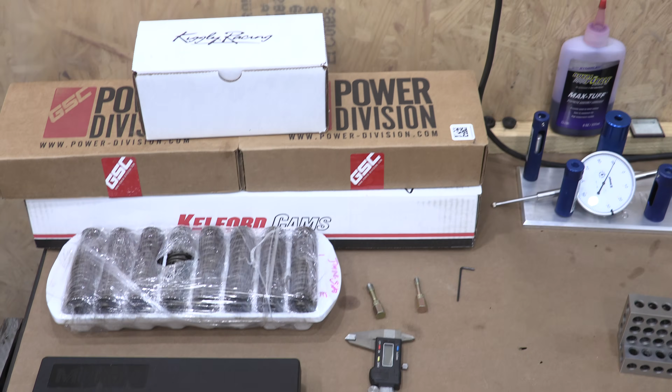Today I'm doing a job that doesn't usually receive the attention it deserves in anyone's home garage. We're going to fondle a few parts and tools, give them all a quick how-you-doing, and then jump right into installing a brand new set of valve springs.

Manufacturing tolerances and variations in the machining of all of the valve train parts can cause anomalies in the height of the valve springs once they're all assembled, and these variations can lead to some pretty ugly problems. People go through great lengths to balance their rotating assembly in the block, and this is the equivalent of doing the exact same thing to the cylinder head.

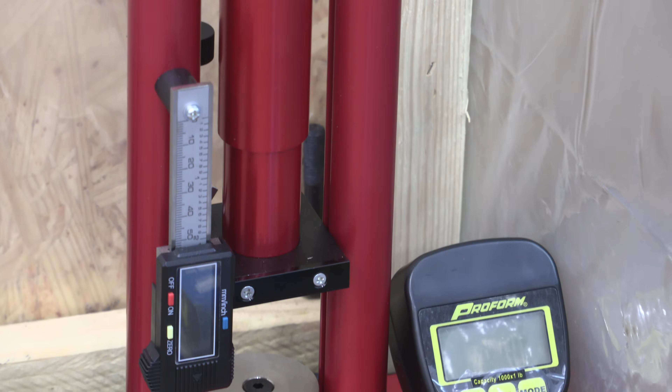So in this video, I'm going to show you what these tools do and how I use them.

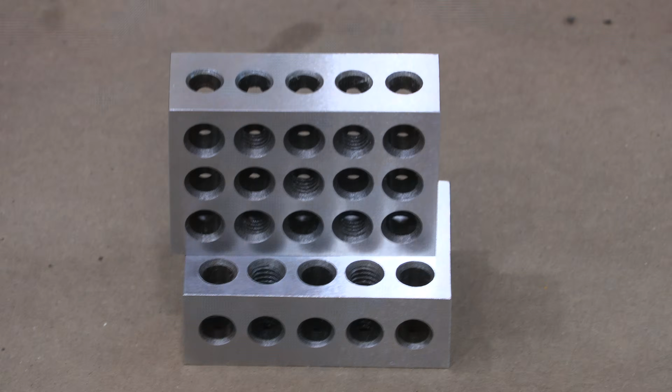These 1-2-3 blocks are really for calibration of depth micrometers, but they also provide a machined straight edge that works great with my stem height gauge. They're called 1-2-3 blocks because depending on which side you set them on, one side is 3 inches, one is 2 inches, and one is 1. I do have a depth mic, and maybe we'll play with it later.

Most people use it for this job, but because of the kind of stem height gauge that I'm using, I won't need it for most of this work.

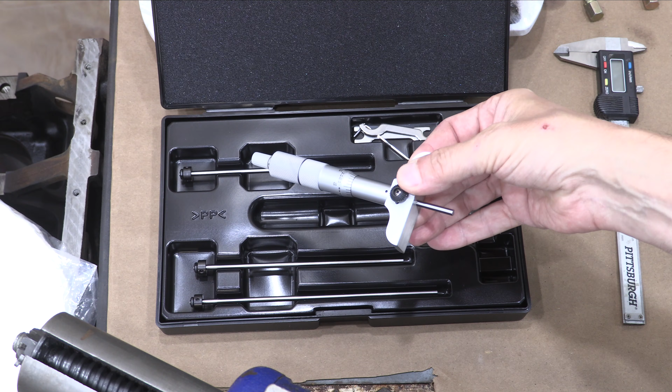Before you begin, your valves need to already be fitted and sealing against the valve seats. That's the stubborn, unchangeable variable. Know that every single part that you stack on top of each valve after that will affect your spring installed height. Keep it all together.

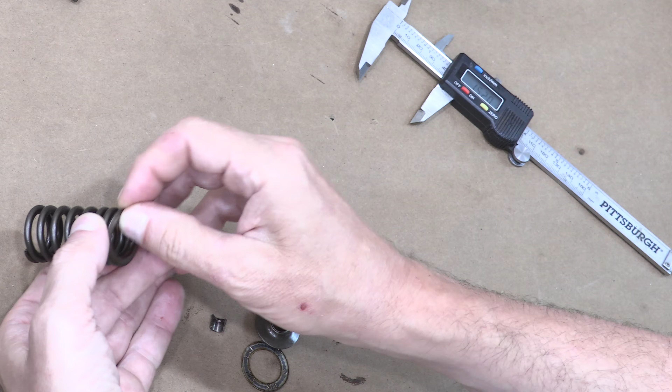Each valve assembly consists of a spring seat, a retainer, and a set of keepers. The keepers are half-round, conically shaped, tapered, hardened steel things that fit into the groove on the tip of the valve, and they rely on the spring pressure to lock them into place. It's what you call an interference fit.

One set of keepers isn't going to fit the retainer and valve the same way that another set will, and this will affect where the retainer lines up on the valve stem. So basically, all of these parts have a thickness, even the keepers.

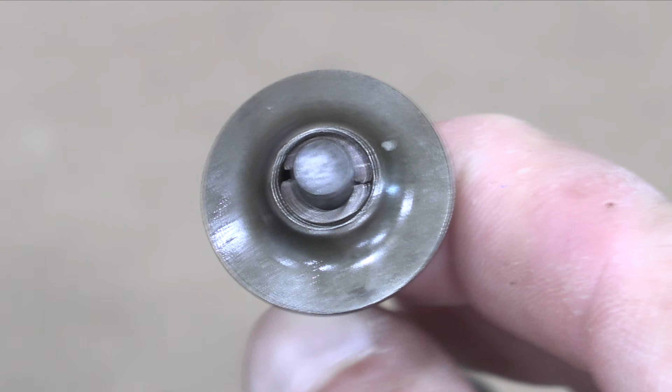The bottom of the retainer has a recessed flange where the top of the spring sits—that's essentially your upper spring seat. The protruding portion below it should fit snugly inside each spring to center it, but this gap complicates measurements for many people. All of these parts need to be measured individually and paired up for the best fit.

The more evenly you're able to balance how they all fit, the smoother and longer your valve train will operate.

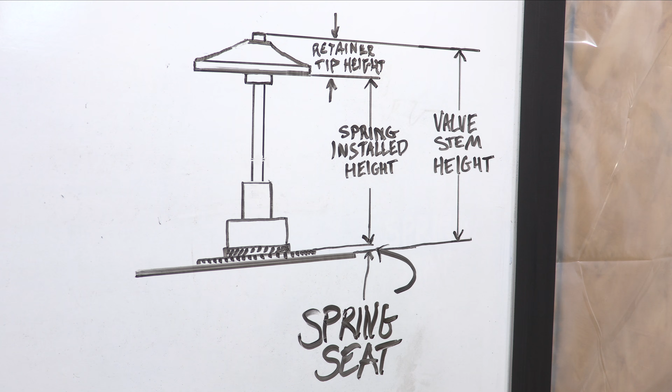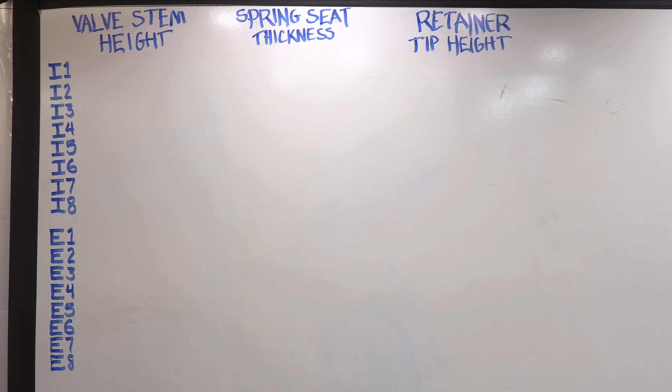There's 3 measurements that we need to focus on to see where we're at: valve stem height, spring seat thickness, and retainer tip height. Only 3 measurements? Well, that's easy. Yeah, times 16. Okay, so maybe it's 48 measurements, and maybe we're only just getting started. Judge me. Start with the stubborn, unchangeable variable first.

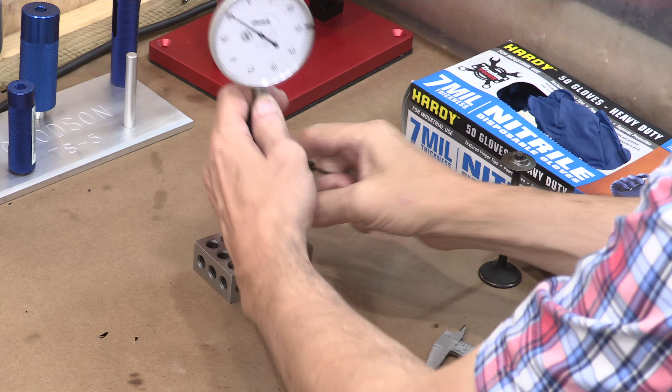To measure valve stem height, it's recommended that you use a valve stem height gauge, but there are other ways. I'm going to use these 1-2-3 blocks to set the zero point on this Goodson valve stem height gauge. This tool remarkably has a 2-inch range, graduated in thousandths of an inch, so I'm just going to put this unit together with the jig that fits my valve seats and zero it on a flat surface. This Goodson unit keeps me from zeroing a tool and then measuring a tool with another tool.

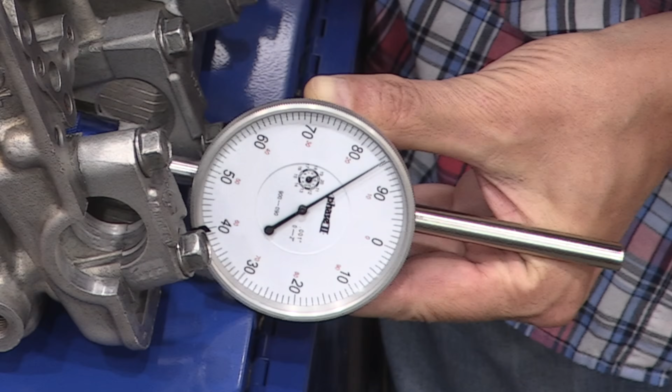Using it is simple. You place the probe tip on the top of the valve stem and fully insert the gauge so that the jig rests squarely on the spring seat. You'll know exactly when you've got it right because if you rotate the gauge, the needle won't move at all. That's how you know it's good.

I've actually already measured these exhaust valves once before, and you can't do the whole job facing the gauge in one direction so that I can show you, because it interferes with the camshafts. It's a big gauge, it's a very tight fit, so I'm just going to blaze through these, checking my previous measurements for now. And there you have it—stem heights for the exhaust valves.

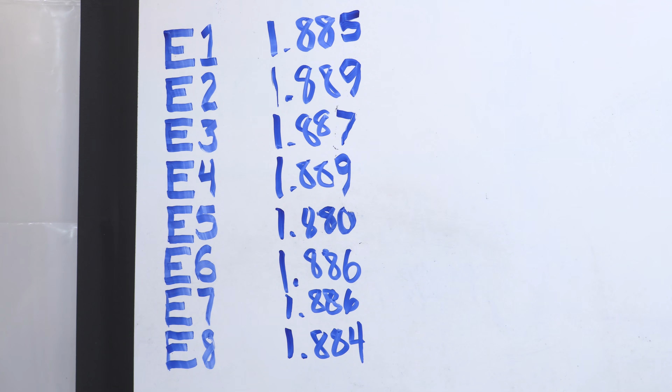Same thing has to be done on the intake valves too, so I recheck my zero point, ignore the parallax error right here from the camera angle—it's actually right—and like I said, same thing.

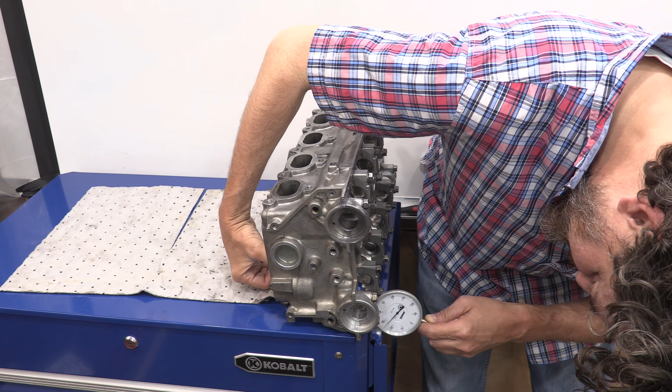I'm holding each valve firmly against the valve seat to ensure that the spring belonging to the stem height gauge won't push the valve open. Because it totally can, so be aware of that.

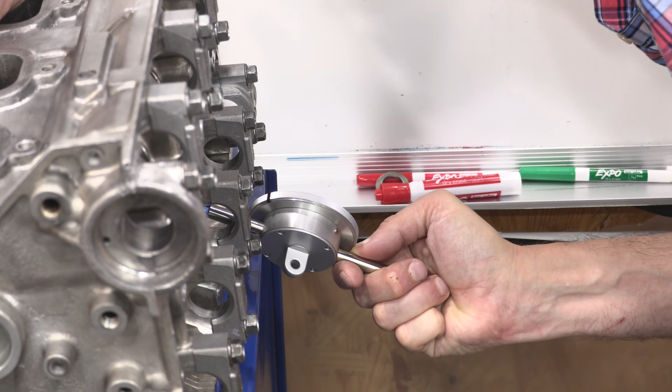Write each number down. What you see in these results is that even a factory valve train that's never been cut, with a brand new quality set of valves and straight guides, produces a variation in stem height of 1/100th of an inch, a little over 0.25 of a millimeter. Depending on your goals, this could be enough to cause a problem with seat pressures all by itself, except I'm going to demonstrate how everyone can actually use this to their advantage.

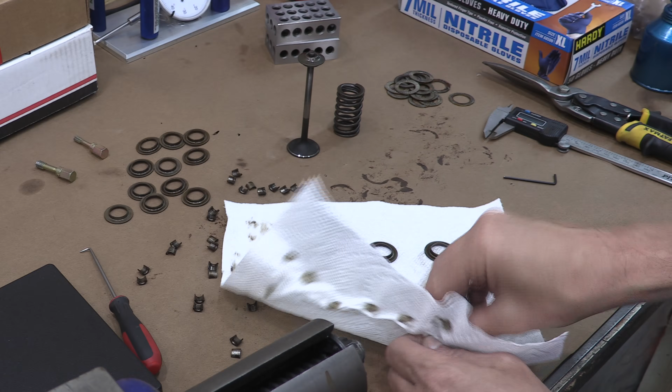Next, we'll do the easy ones: spring seats. Other than mine being shrink-wrapped into an ice cube tray with all the other associated parts from the old Galant head, and speaking of which, might as well get those other parts too. I need the keepers, and there's even a set of shims in here that I plan to measure. But anyway, other than having to dig all this out, mine are totally uncomplicated. Some have an outer lip making them harder to measure, but mine don't.

I gave all of it a quick wipe down, and now that I've dug the shims out, I really can't resist measuring them any longer. Looks like all 16 of them are 30 thousandths. There's no way anyone cut 30 thousandths off the valve seats from the head these parts came from. There's only 8 thou there to cut, so it's an odd shim choice.

When you measure the seats, you'd measure from where the spring rests to the bottom of the seat in several places around its circumference, using the tips of your calipers aimed at the center of the part. Make sure they're all the same measurement and write it down. Do this for all your spring seats. For the severely retentive, number all 16 and keep them in order.

I'm a little bit lazy. I cheated—I made different piles for different sizes, and I'm just going to put them where I think each one needs to be in the seat pockets in the head, because mine are all really close. They all measure between 40 and 42 thousandths. There was only one that was 39 in the pool. This is just my way of keeping them organized for now.

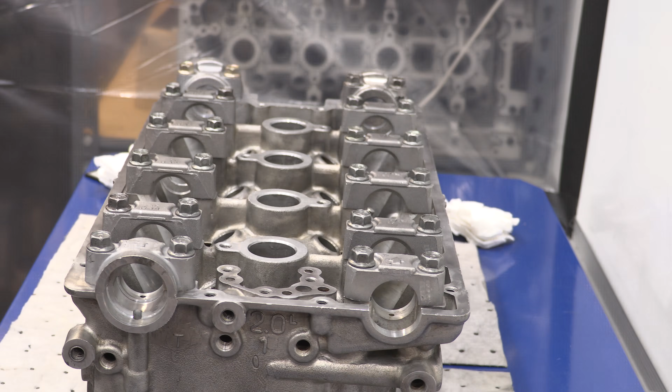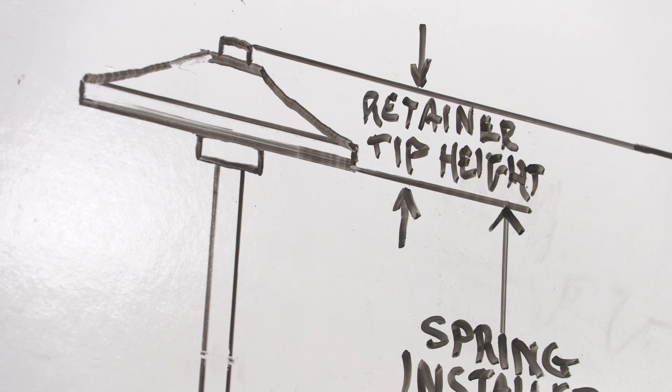This is where things get fun: measuring retainer tip height. Of course, to measure this, I'm going to need to put all the valves back in the head first. I numbered these things in the last video to make them really hard to mix up. I just put them back in the boxes they came in.

Next, I get all the springs and the retainers out of their packaging—cool, because I love opening new stuff. One of the things I like about Kiggly beehives is how the tapered springs and their smaller diameter retainers help focus all of their lifting forces closer to the center of the valve than the factory spring does. That actually helps reduce the potential for damaging valve guides because it holds the valve more upright in all of its movements. It's also much lighter with the titanium retainers, but I just bought the standard steel ones because my power and rev limit goals don't require that on this build.

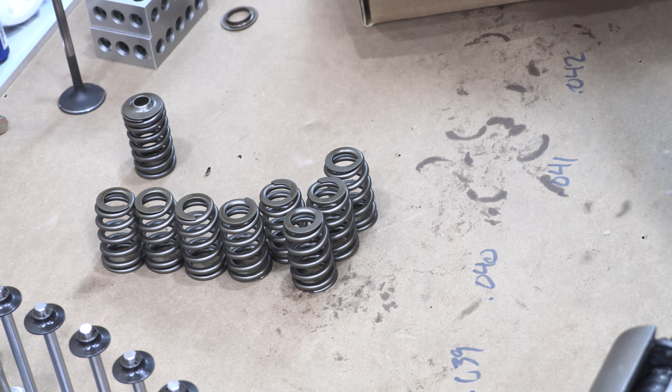Retainer tip height is usually a combination of measurements because of the shapes of the parts, and that's plural because the retainer, valve, and keepers all play a factor in the result. How they fit together suddenly matters in the math. You've got the thickness of the retainer, the depth of the step, the differences in the keeper tolerances, and even possible differences in the overall length of the valve if there's ever been a valve job performed on it. Add to that, the flat surfaces you need to measure are offset, making it impossible to fit your calipers simultaneously on both surfaces to take an accurate measurement.

I can show you the complicated version of doing these measurements, but...

Yo dog, I heard you like vices, so we put a vice in your vice. Oh no, Jafro, what are you doing?

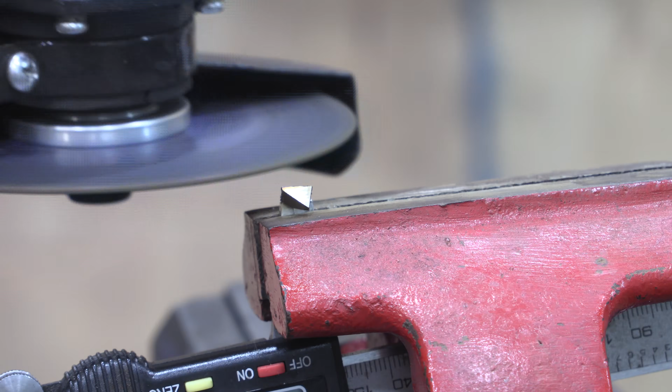Yes, I cleaned that up with a flat file, and now I've got offset calipers for measuring retainer tip height. Under 20 bucks at Harbor Freight.

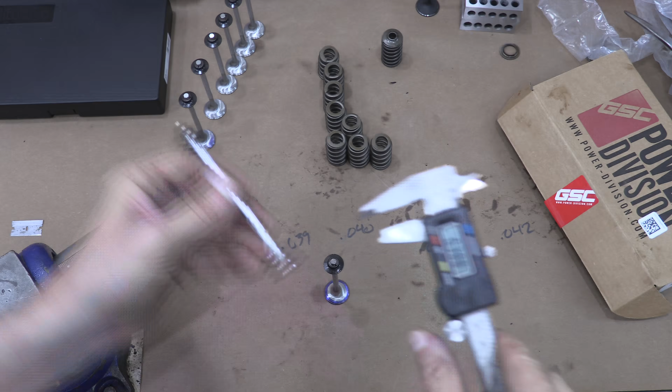I had to share this little trick I learned from Boosted Beaver's build thread on DSM Tuners, he's on YouTube too. The only thing you have to be careful about is keeping the valve and the caliper square with one another, and keeping the tip of the caliper centered and square on the tip of the valve. You get a feel for it, but you'll develop that feel faster if you backlight it. It makes it easier to see if you're square.

Write each one of them down and keep them in order. You can see I've got a variation in retainer tip heights of 15 thousandths of an inch. Now let's do the intake valves, same exact thing.

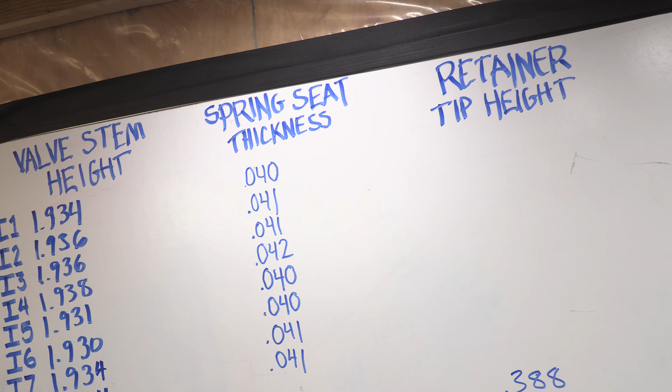You thought I was going to make you do all that math, didn't you? Well, this fits the price, quality, speed, pick 2 example. It simply adds easy to the mix.

If you want other measurements explained by a machinist, look up my Cylinder Head 203 video. That's what happens there. The only reason I hammer points about accuracy in my videos is simply to help people be mindful about what's in their hands and why they're doing it, how they're doing it.

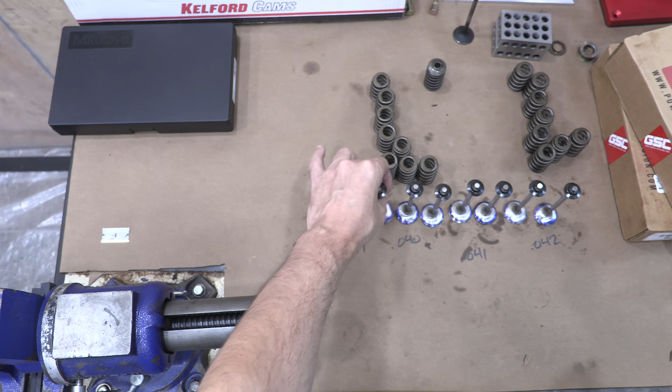The accuracy range of cheap calipers is fine for this job because you'd otherwise have to take 3 separate measurements to get your retainer tip height with the exact same inaccurate calipers, then manually do the math and add all that and mux it together. More than tripling your margin of error because you made yourself a part of the circuit.

I like this trick, and I'll use it for a lifetime, or at least until the batteries die.

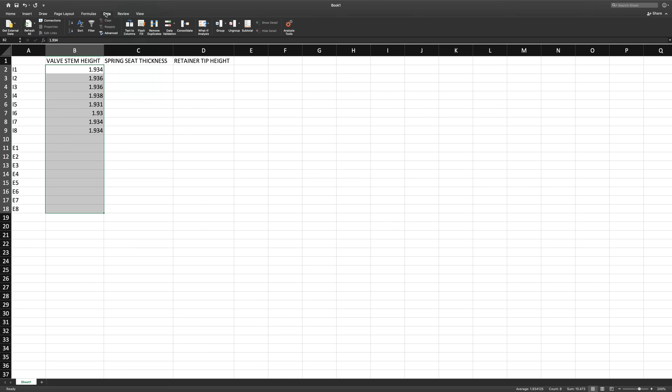Now with all these numbers, we're actually able to determine what the cylinder head's available spring install height is for every single valve. I'm just going to transfer these numbers into a spreadsheet now, because the calculation to do this is extremely simple: it's valve stem height minus spring seat thickness minus retainer tip height.

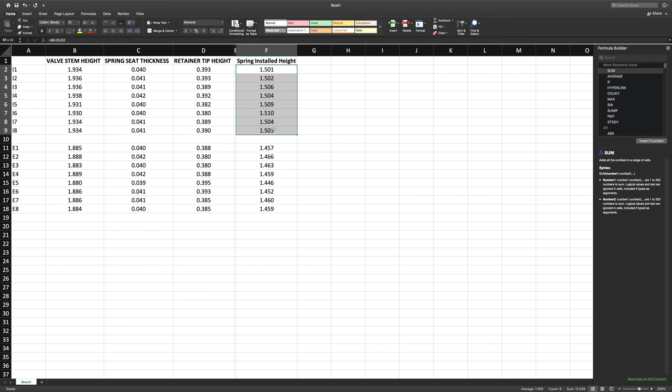I didn't feel like boring you with a whole lot of simple math, so I'll let the spreadsheet do it for me. In fact, creating the spreadsheet is so boring that suddenly I'm back in the garage with all the valves out in front of me again, which I have checked, double checked, and triple checked, making sure I had all the numbers right.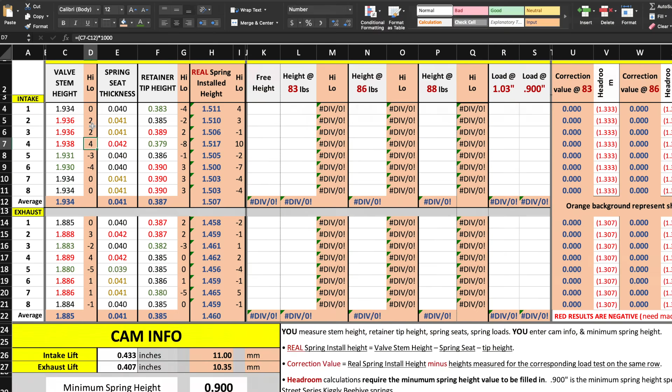It gives me the low, represented by a negative number, and a high, represented by a positive number, based off of the average. So this is 4 less than average and 4 greater than average. That's all there is to this column, that's what the calculation up here says. And you can see I've multiplied it by 1,000 so that it gives me the results in whole thousandths rather than thousandth decimal. So high-low is in thousandths.

Alright, spring seat thickness, didn't do anything special there, this is just pretty much a placeholder. These are all used in the calculation to figure out the real spring installed height, that's an important thing we just talked about. Retainer tip height, same sort of deal. All of these measurements are what we took with the calipers after we cut them.

You can see that I've got a range here of negative 8 thousandths to positive 3 thousandths, so there's my low to high, that's a range of about 12 thousandths of variation. And you know, here, right here, we've got 8 thousandths variation. And by the end, when all the math is done, we have 17 thousandths variation. You can see how reshuffling some of these values will actually wind up giving you a better result. It's sort of like a puzzle at Cracker Barrel, this little brain teaser thing.

So anyway, free height, this is for springs. If you look up here at the top, I've got them labeled: these are valve measurements, these are spring measurements, this is the fit, and all of these are calculations.

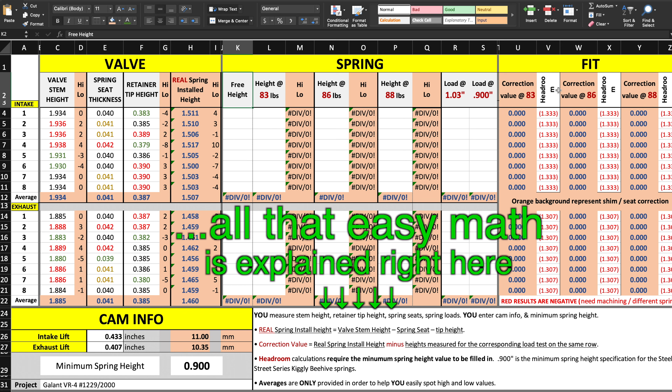This just gives you results to chew on after you finish filling in all of the other fields. Everything is redundant in the top column for the intake as it is for the exhaust. Down here on the bottom, I've got cam info where I've added fields for intake lift and exhaust lift.

This is used in the calculations under fit for the headroom value. Basically you take the height at a given spring pressure, subtract the minimum spring height from it, and subtract the lift from it. By doing that, you come up with how much room you've got until spring bind, because that's what minimum spring height is. Kiggly recommends you don't install the springs any smaller than 9/10 of an inch.

They get into spring bind very shortly after that, but this is the minimum recommended height you should ever use. So I entered that into the value, and that gives me the information for how much headroom is left when I'm finished. If I run out of headroom and get into spring bind, these values turn negative and flip red like they are right now. That tells me I'd have to go get machining or a different valve spring to make that work. I've put notes for all of this in the database so I can use it again someday and know what I'm talking about.

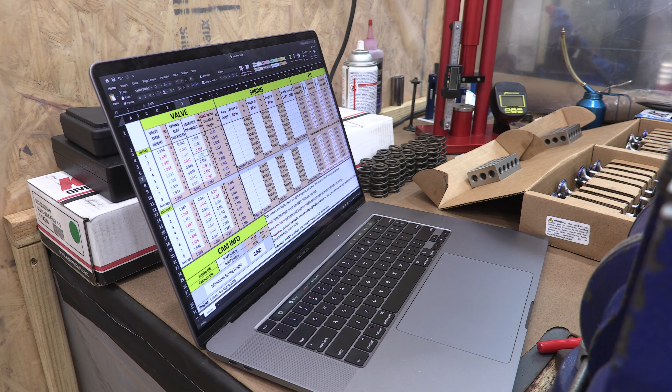The correction values are exactly what they sound like. Basically this tells you the difference between your real spring installed height and the spring height at whatever given pressure we measure in just a minute. Rather than shuffle any of these things around to save time, let's measure the springs first and fill out all the rest of these values, how our springs are behaving, and that'll give us a better idea of where to put things in the long run.

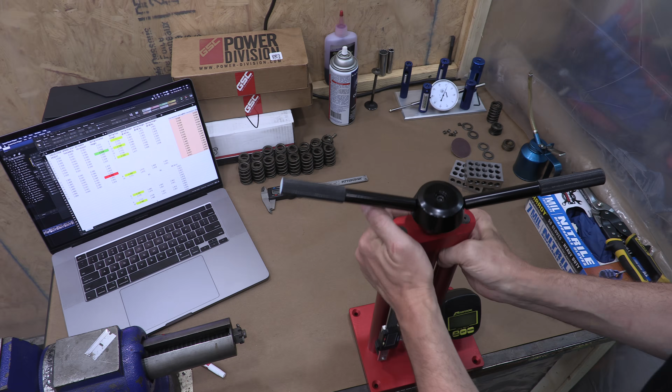Now I know this is the tool everybody really wants to see get used here. This is a Proform valve spring load tester, and it measures the height and spring load of your valve springs. It can handle a spring up to 4 inches and up to 1,000 pounds.

When you move this thing, it automatically turns on the micrometer that does the measuring portion of this process. Naturally it arrives on your doorstep with the batteries installed, dead batteries installed. I'd have to say the build quality on this unit is about 9 out of 10. It's got little cosmetic things, like how well the sticker's stuck down when you put a screw through it and twist it down here in the corner, but you can't see that because it's behind the clamp anyway. It's a good unit, and it's going to serve my purposes.

The first thing you have to do is zero it, and after you get it zeroed, both the scale and the micrometer, you can go to town and measure all your valve springs, and it'll give you however much pressure they're making at whatever height you have them squished at.

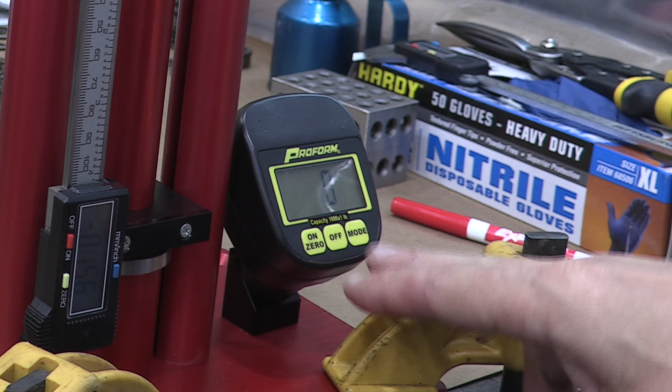Calibration goes like this: basically you screw the thing all the way down. Oh, I have to turn the scale on first. It also has a nice feature where if you hit the mode button and zero at the same time, and the on button, let's see if I can hit them together. There we go, backlighted. That one's not backlighted, but that one is. Pretty cool. So, anyway, the way this works...

If I can get you in here a little closer, the way this works is you basically turn the thing down until you're at 1 pound. And right as you creep up on 1 pound, it happens quick, so after you touch 1 it jumps up fast. But you just creep up on your zero point. When you get 1 pound, you zero that, and it remembers the zero point even when it cuts off.

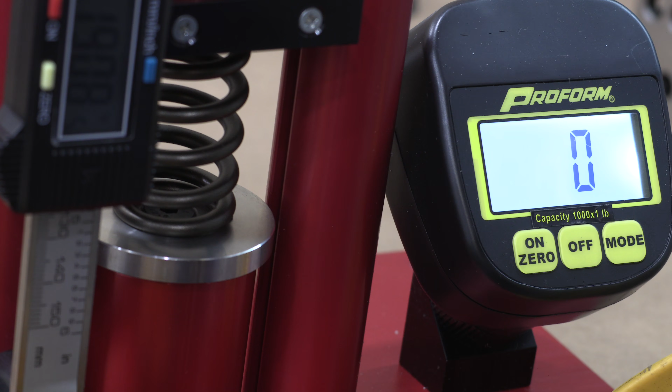So anyway, what I'm going to do is run through the measurements for each of these valve springs and record them in the spreadsheet. Let's start with number 1, and we'll fill this in on the intake side. You line up your valve spring in the very center, crank it down just like we did with the calibration. When you hit 1 pound, you stop, and there is your free height measurement: 1.776.

Now we squish the valve spring down until we hit 83 pounds. That's what Kelford recommends for the seat pressure on the TX264s. So 83 pounds is where we'll take our first point of reference, but I'm going to measure a few other points in between just to see how that affects things in case we have to change the seat pressure around for our needs.

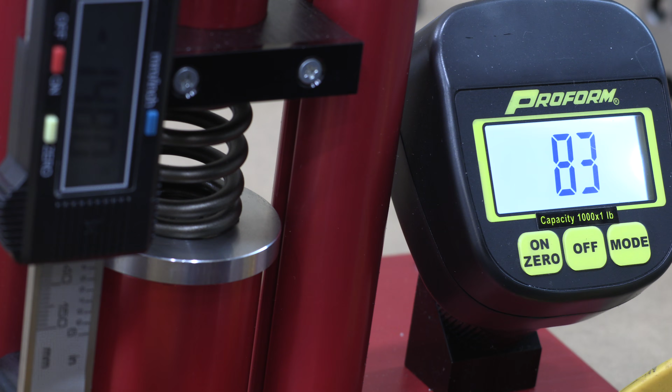So here we are creeping up on 83, and as soon as it flips to 83, we've got 1.480. Put that in the database. And now creep up on 86. We have 1.468. And now we go for 88 pounds. We have 1.461.

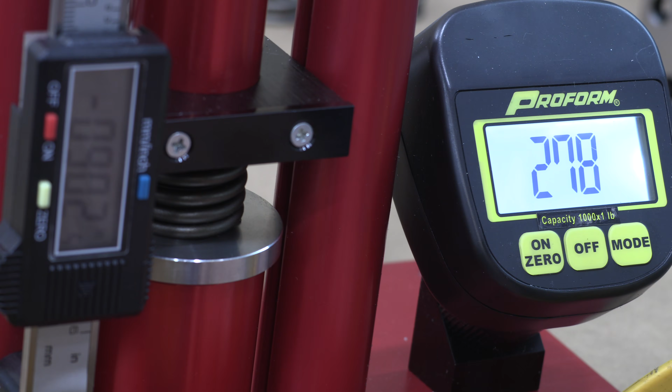Now here's where we start to have some fun. I'm going to crank this down until we get to 1.030, and we have 225 pounds, so roughly 225 pounds of seat pressure when the valves are fully closed. Let's go for 900. You can see at their bind setting, they're at roughly 280 pounds. So at their minimum installed height, they're roughly 280 pound springs.

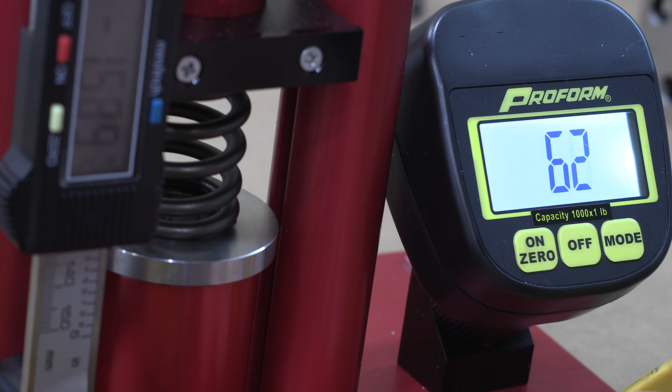Record your measurements, move on, do the next one just like this one. And here we go, adding another 96 measurements to our first 48. I told you we were just getting started.

The free height, 1.03 inch, and minimum install height measurements I took for each spring aren't actually used in any of the calculations. They're just for my own personal reference and to help me get to know each spring a little bit better. So 32 of these measurements aren't really necessary. But as I fill in this data, you can see how the correction and headroom cells fill themselves in.

Alright, so I got all the stuff out now. And now that we're back here again with all these numbers, I'm just going to basically figure out which ones are the big springs, which ones are the big retainers, which ones are the big spring seats. I'm going to shuffle all this stuff around in order to make all these numbers jive and work out, because there's going to be a range of values for everything, and you can see that here. Looking at it at first glance, the real spring installed height, there's a considerable difference of about 40 thousandths of an inch between these two sets of valves.

So naturally, what would be the smart thing in order to preserve your spring height and try to run as low a pressure as you can? You take all your small springs and put them on the exhaust. So I guess right out of the box, I'm going to decide that I'm going to run this thing at 86 pounds of seat pressure. So I'm going to take all of the small values - you can see here I've already highlighted the big ones in red. These are all going to end up on the top, and these are all going to end up on the bottom. So I got to shuffle springs in order to really get a good perception of where that's at.

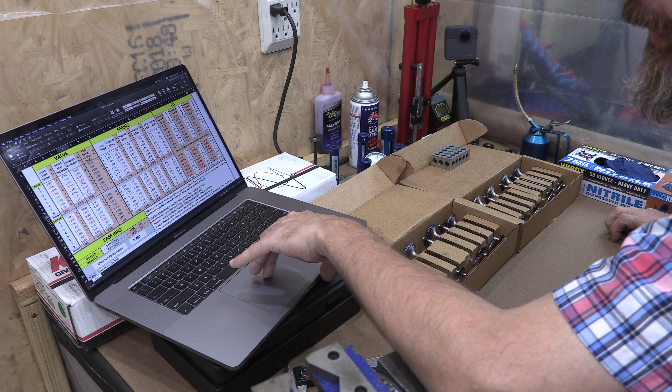So right off the bat, I think what I want to do first is take all of the retainers that are small and move them down to the bottom, and take the big retainers and move them up to the top. This is in an effort to take these averages - you see right here, they're only 2 thousandths apart. By taking all the small ones and putting them together, and taking the big ones and putting them together, I'm just moving a larger gap between these two averages, so there's going to be a bigger step there. You'll see when it's finished here.

So number 1 intake is 383, and I'm going to go ahead and just pop that one off. Which one can I put in its place? I'm going to take number 1 on the exhaust, swap them, check them.

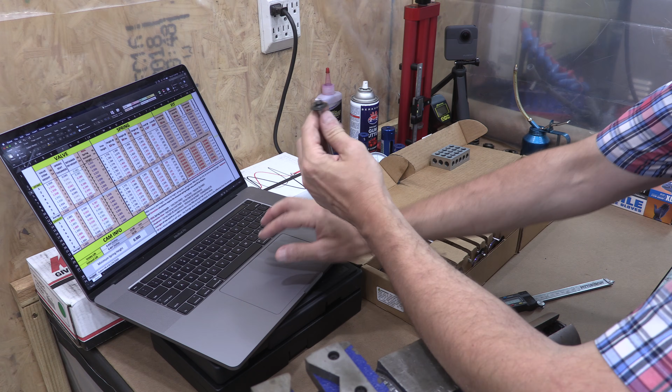Actually got 378.5, which is pretty cool. That means not only did I move it, but I actually gained 5/10. But we know that may not be accurate, so I'm just going to leave it the way it's notated. So we just moved number 383 here, and it's now 379.

And we'll check number 1 intake again. I'll check my zero—that's got to be it. That's it right there, that's where that half thou is. 398, you see I've just corrected these values. Number 1 is 398, this one is now, I believe, 379. We're going to change that back to green because, well, it's fixed.

Next one's got number 2 on the intake, and number 2 on the exhaust. So we got 380 now. Exhaust, 380. Let's check the intake. Got a solid 394. And that is now red.

We got this tiny little guy here on intake number 4, and we got this big old boy on number 6. It appears as though all the way around I have a 373.

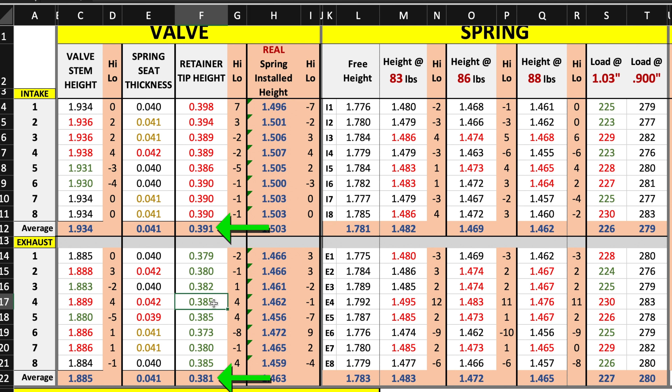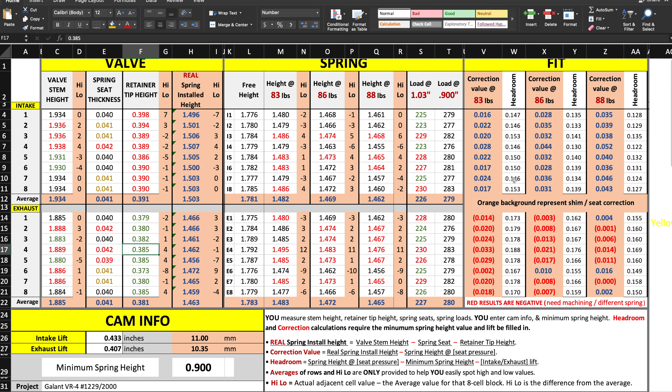Now you'll see that dramatic difference. With all the big retainers on top and all the small retainers on the bottom, I've now got a spread of 10 thousandths between the intake and the exhaust valve. So I've shaved 10 thousandths off the difference of the installed spring height requirements. It made it look as though some of these numbers are viable, and you see one of them right here is extremely viable.

I might have to shuffle some stuff around further, and I will. But I think what I want to do next is shift the springs first before I make any of those decisions. So at 86 pounds, I'm going to take all of the heaviest springs and do the exact same thing with the intake side—put the big heavy springs on the intake side and the lighter springs on the exhaust. Right about there, that's the point where you don't need to hear me babble for hours about every little thing I was working on. You get it. I just wanted you to see a few get done so you could see how easy this really is. Time's your only expense here.

By having separated the springs and retainers into large and small groups and assigning them accordingly to the tall and short sets of valves, we basically cut our struggles in half. Once sorted, I shuffled the parts among each set of valves to get as close as I can to my goals, and then went back and swapped retainers around again for the stubborn ones.

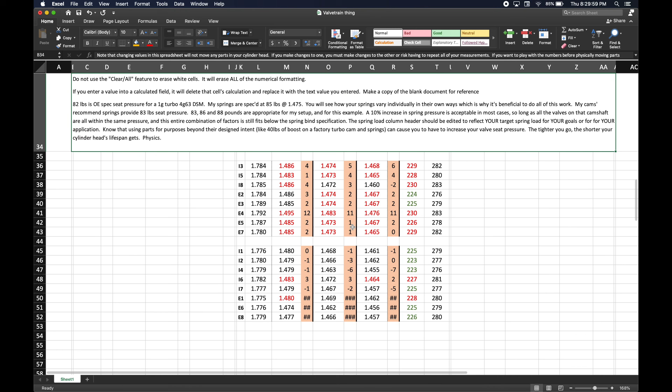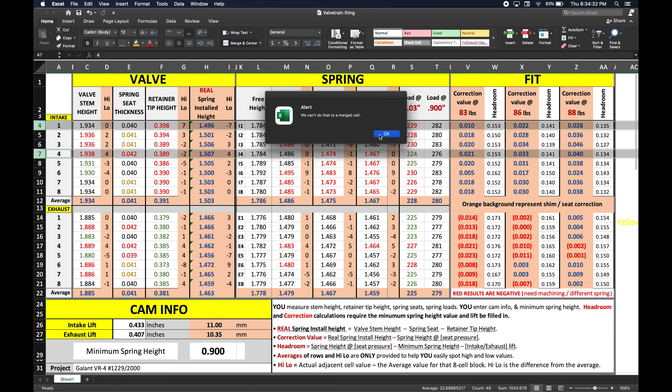The spreadsheet I made easily reveals whatever I need to change because it's updating the math for me as I go along. What you see me doing is copying the group of parts I'm moving, pasting them below the spreadsheet, and making my changes there. Then I move the parts and paste them back into the cells above once that's done. That way I can easily stay in sync with both the spreadsheet and my parts. I'm also trying not to break anything in the spreadsheet, only copying the white cells that don't contain calculations, because Excel does some really funky stuff if you paste a calculation over top of another calculation. If it came from a different cell, it doesn't care if it's the same calculation.

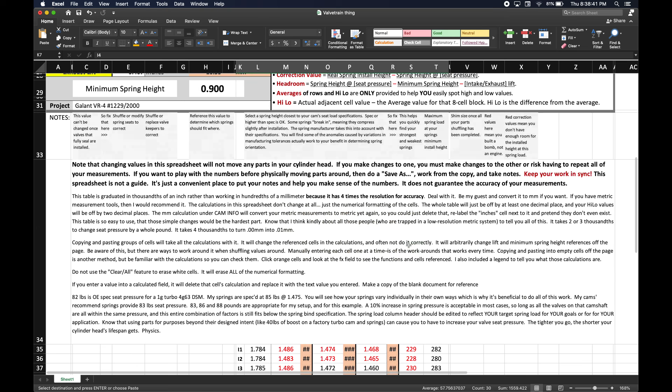Each time I move a group of parts, I get closer. As some of them zero out, it gets even easier for me to see what I have left to work with.

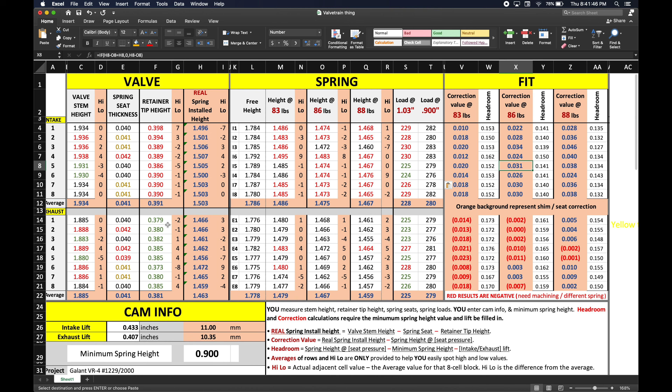You get a lot more height adjustment from swapping springs to a different valve tip height or shuffling retainers and keepers than you will with shuffling seats. So essentially what I'm doing is just exploiting one variation from one part out of spec equally with another out of spec combination of parts on another valve.

I use the correction value fields to see how close I am and to try to get those values either zeroed out or to a positive number divisible by 15 thousandths, because those are the standard size shims that I'm able to buy. They come in increments of 15 thousandths, they just do.

With shims, you've got reverse Price is Right rules. Closest install height to the seat pressure without going under wins. If you get within 10% above the minimum seat pressure and still have headroom before spring bind, it's perfectly acceptable to do that.

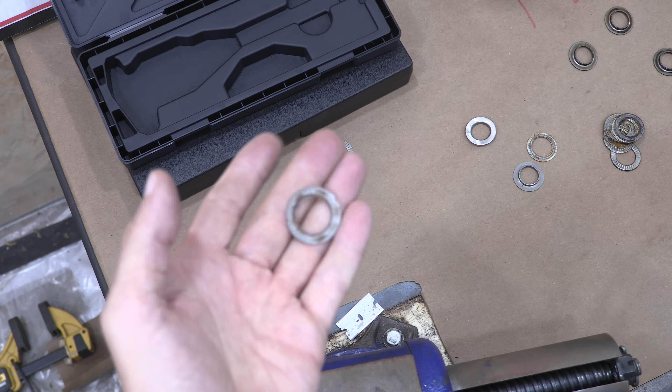So 15 thousandths is all the forgiveness you get with shims, and the process you see me doing right here is exactly why. But if perfection is your goal, there's even more you can do after you've done your best job shuffling, and I'll show you.

Your spring seat, block of wood. I should have said your spare spring seat, because now you've pretty much destroyed it. I did that to put a groove in the wood to hold a different seat still and show you this trick. So anyway, take your die grinder with a coarse Roloc sanding disc, flat against it, and sand the bottom of the seat down.

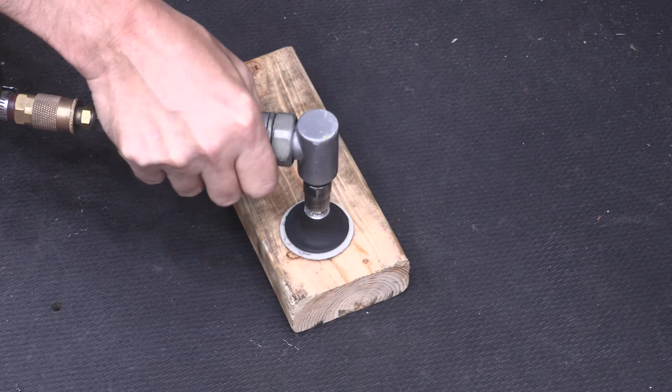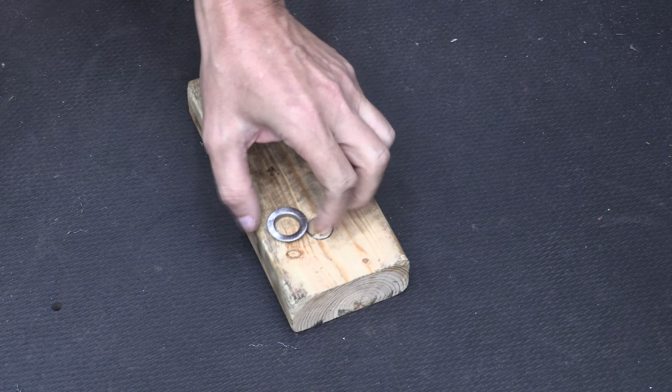You're sanding steel, so it's slow going, and the seat gets super hot, which is the other reason I made this jig. Pro tip, I found a use for your 18mm 12-point socket. The seat fits perfectly inside of it, saving you from crushing it with a hammer.

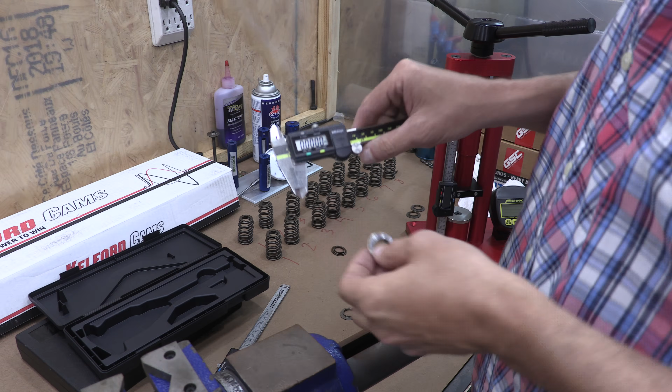I may have done this on my anti-fatigue mat already, a little too melty, but the goal is to make the seat slightly thinner and sneak up on the correction value you need without burning yourself. I wouldn't go more than 10 thousandths smaller than the factory seat, but you should be able to shuffle everything else around and get well within that range prior to ever having to resort to something like this, if at all. But I'm going to do it on a few valves, just cause.

While some will insist this is a completely unnecessary level of detail to achieve on this job, and provide sound reasoning for why it's unnecessary, I assure you there's still a performance benefit for doing it.

I told you I'd show you how to set up the smoothest running valve train possible, and this would be how you'd do that. Each time a cam lobe lifts a valve, it transfers its spring load to the camshaft. This creates a torsional vibration in that camshaft. If you've got your springs set at different loads, it's playing a symphony of different beats, even though the frequency is a constant.

Your valve train is connected to the timing belt, is connected to the crankshaft, is connected to your engine accessories, or connected to your cam angle sensor, or connected to the ECU. You get it? So the more time you take to balance out your spring loads and the less harmonic and torsional vibrations you introduce to all those parts, the better. Especially for that rubber ring in the middle of your stock crank damper pulley.

Think I'm kidding. So here we are after a considerable amount of part swapping. I'm getting really happy with the results, and there's only a tiny little bit left for me to do. Whittling away at these, we're now starting to see a lot at or near zero.

Intake correction values hovering around 30 thousandths too. These are all positive developments. Only a few left to go, and the ones that are off by only one can usually be solved by swapping spring seats.

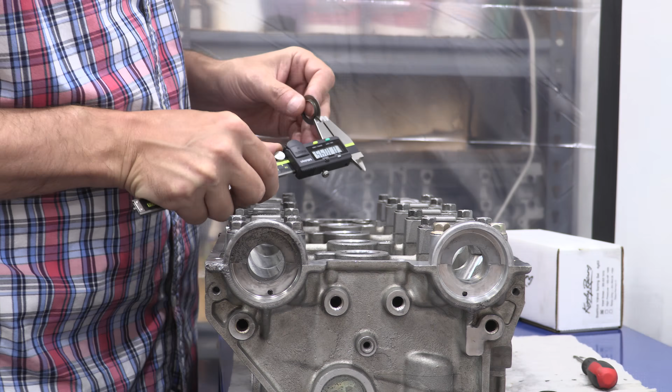I see that one that's off by 8 thousandths has a 42 on it. I think I'm going to use that and put it on intake number 2, then swap retainers around to fix intakes number 3 and 4 if I can.

You may have picked up on how I'm measuring and checking the parts as I go to ensure I'm moving the correct parts and that my measurements are correct. I'm constantly checking myself, and it's likely I'll blank this spreadsheet when I'm done and do it all again to check my work. I won't make you watch that.

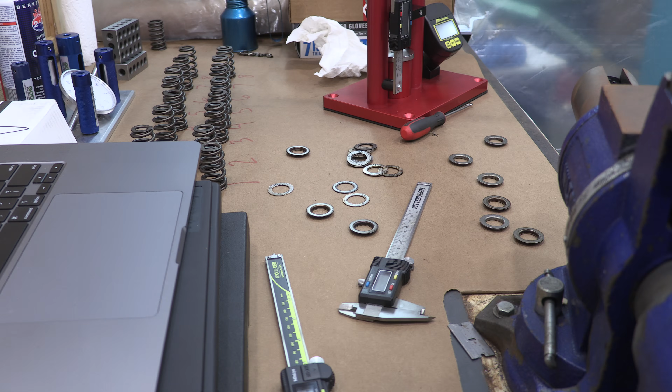Put the 42 on intake number 2, and now I've only got 4 left. I'm going to go ahead and swap these retainers around and see where that puts us.

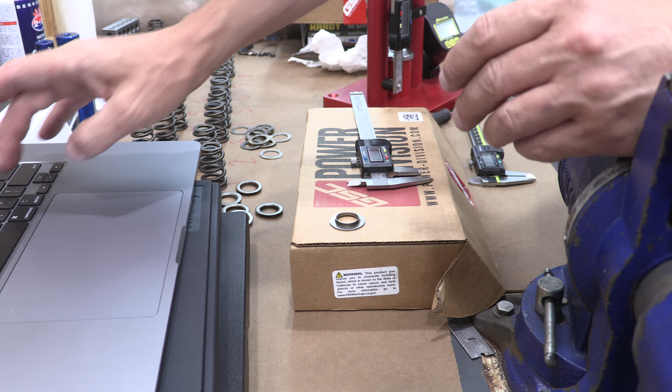Sure enough, one's still at 395, and for intake number 4, 392. I did screw something up. I mixed up the keepers with different retainers. I'm also not interested in figuring out which ones. I've got them one under and one over now. This is why I measure the things that I'm moving.

The seats are pretty far apart, so I can't swap them. I hope I can find another 42. Maybe I overlooked one. I've got so many cylinder heads laying around that I should be able to produce one for number 3, but it looks like I still need another custom seat. I'll just find one that's suitable for this first.

Here's one measuring 39.5. I don't have to go far. I've just got to produce a 37 with it.

And there you go. Just like that, we're done with the intake side. Now all I've got left is the 2 bangers on the exhaust.

We'll start by swapping those springs. That was easy. Now for the hard part: moving the spring loads around. I've got 5 measurements that belong to each spring.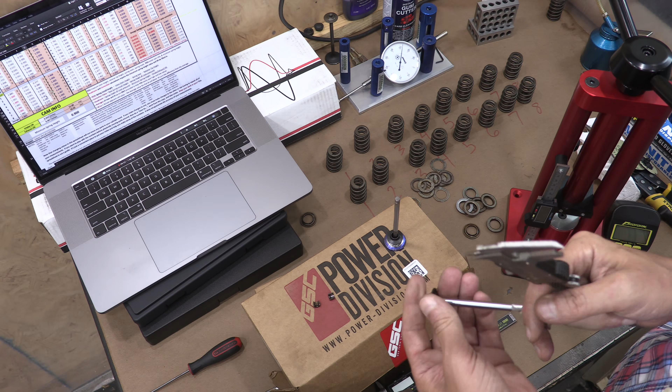This process helped me discover an issue with how Excel works, and I'll talk about that in a minute. What we had here was one valve 10 thousandths too tall for the spring, and one that's 8 thousandths too short. There's also a variation of 2 thousandths on valve tip height, and swapping the springs alone didn't fix it.

So I get to swap the retainers too. On these two, all the math had to move. They're closer, but they're both over, which means I need bigger seats than I've got.

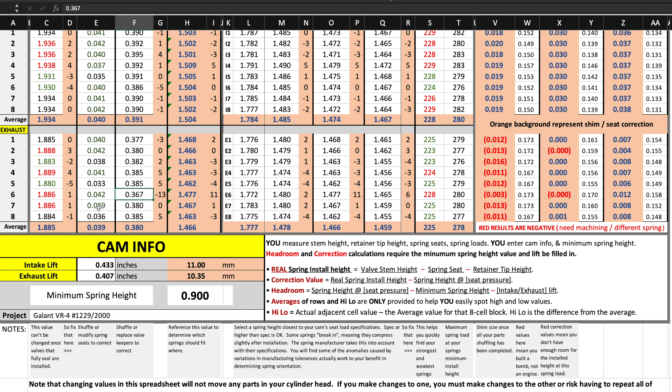I dug through my parts shelf and found another 42. That easily solves exhaust number 6, but once again, I've got to replace a 36 with another 37. It just doesn't like my 36s. Rejection. Prefers 37s. Who knew?

This is nuts. I don't think I've ever had a cylinder head this on point before, and now that I have these tools in my arsenal, I'll be able to do it again and again.

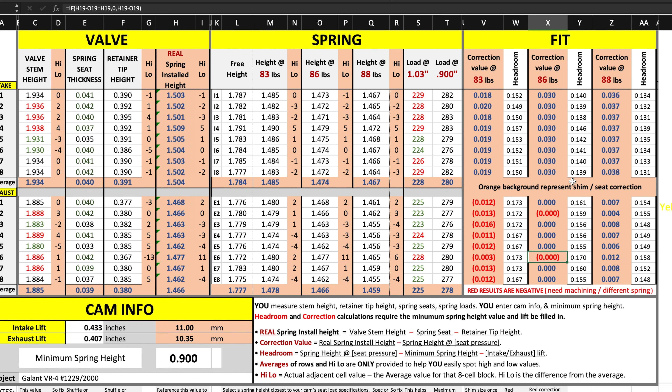If I only had one project car, I probably wouldn't have done this myself. It would have been cheaper to pay someone to do it for me. But would they have done all this? I can't answer that, because I did this myself instead.

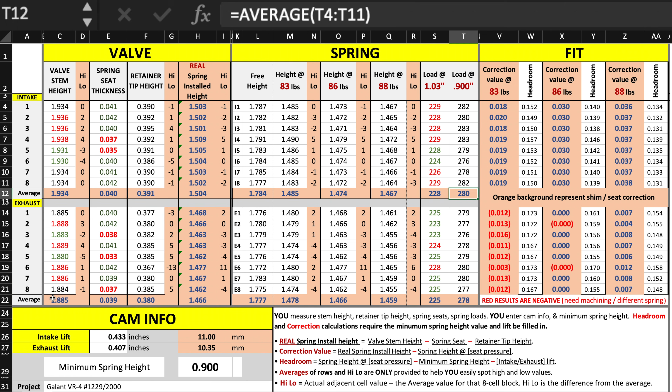Here's the after. The reason this is so ridiculous is that most people will aim for within 10% tighter than spec and call it a day, or they'd let a few of them slide. I did it this way to demonstrate that it can be done.

All the performance benefits are really going to come from my cam selection and the work I did sealing up the valves. This just helps the engine run smoother, and hopefully for longer.

My seat pressure is only 3.61% higher than the minimum seat pressure spec, but on every single valve it's exactly the same. That's intentional, because I plan to turn the wick up higher than stock boost pressure on this thing. We're 3 pounds higher than Kelford's minimum seat pressure recommendation, 4 pounds higher than the factory valve springs and cams, and only 1 pound higher than Kiggly's rating at installed height.

You can see how the headroom exhibits loads of extra clearance, safely far away from spring bind. Even though nearly every single part we measured was unique in its own special way, the correction value column proves that amidst all this chaos, this is what perfection looks like. Everything's still totally out of spec, just in all the right places. So it's normal, and I'll sign off on this one too.

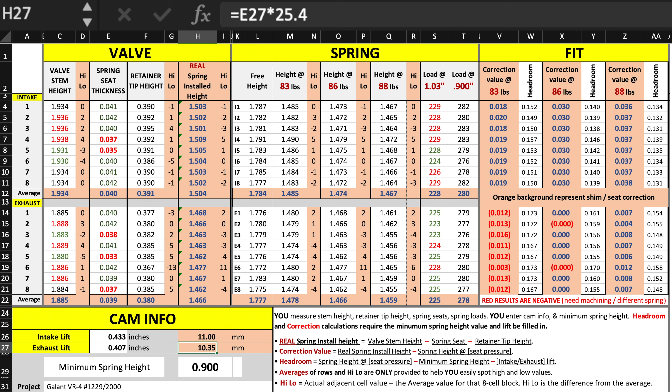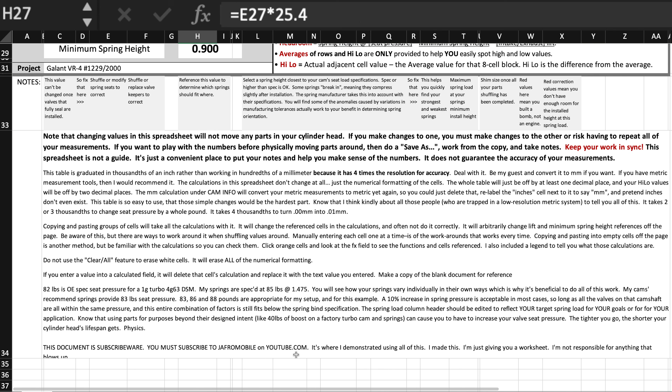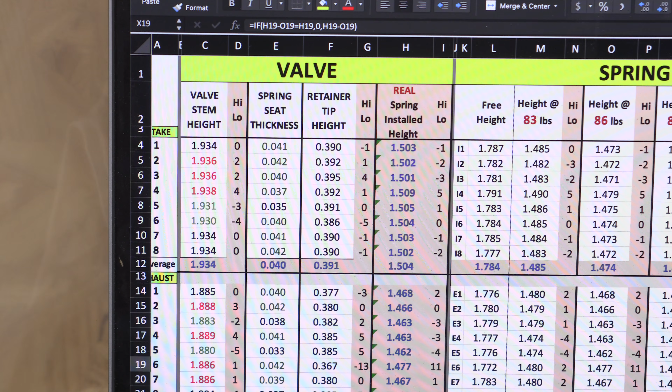There's good stuff in there too. It's not time consuming to make this, it's just time consuming to make it pretty for a video. In the time it's taken for me to complain about the unfortunate side effect of this file format versus its simplicity, I've actually already tabbed through all the calculated fields, and the FX formula bar up top has shown every single calculation for every calculated cell.

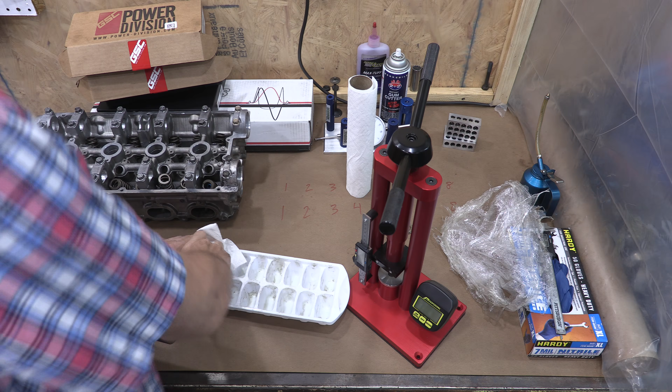I've got complete confidence in your ability to make a spreadsheet that fits your needs if you have access to the kinds of tools that do this. But let's be serious, almost nobody does this. When they want this done right, they pay someone to do it. I'm not advertising my services for hire, sorry guys, you're here taking automotive advice from the IT guy. I just wanted you to see how this works.

You're seeing me break this down right now and clean my mess up because it's not assembly time yet. All this is going right back in the ice cube trays because this cylinder head needs to be resurfaced before I can use it. I've proven that my parts selections for this head all fit unusually well when properly shuffled, and it just takes me time to do it. It takes a lot of patience and creativity. Sometimes it even takes forgiveness to finish this job, but today was not that day.

You really only need to keep it within a few thousandths over your target seat pressure, and you're golden. That should be your goal. This video just proves that it's possible to split the razor's edge of where 85 pounds turns into 86 on every spring and get away with using the same size standard shim on every single intake valve.

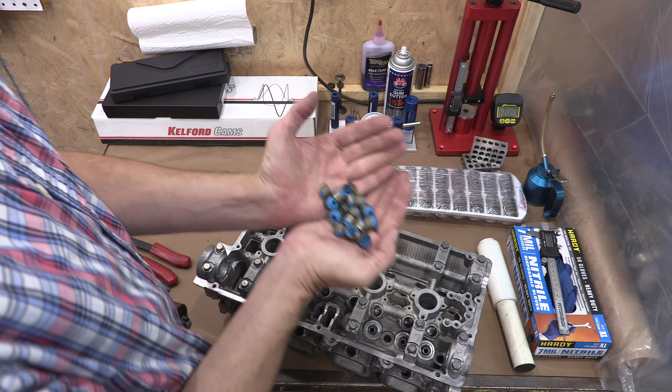I won't do a bush resurface on a virgin head that's in this perfect condition. I'd be struck down by lightning if it were such a sin, and this one will be properly shaved by professionals. I'll do them a favor and pull these valve stem seals. These were a $13 sacrifice to the gods of speed, and they'll never be forgotten. I have others, it's okay.

Tuning the springs to match the same linear seat pressures throughout all their individual travels is no different than a guitarist tuning one of these things by ear, checking all the harmonics on every single string, and finding every single one of them in perfect intonation. Whether we're talking about strings or springs, there's a mechanical aspect to tuning an engine that's much like a musical instrument. So get that right first before you play it.